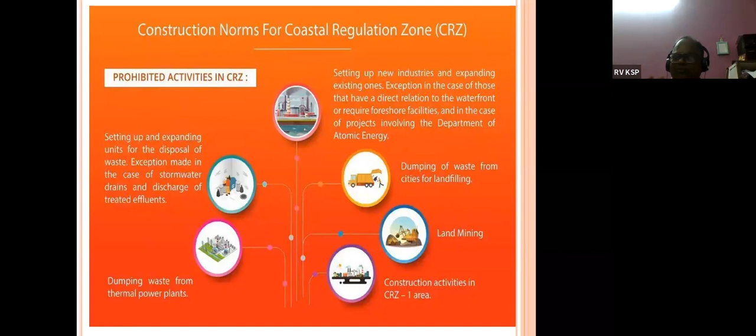Even for a plant, whenever we visit, we check what approvals they have, like factory industries approval, industrial shed approval from the Director of Industrial Safety with regard to the building, and any local body approval they have taken. We check all approvals to ensure they have not violated any regulation. That is one of the most important things we need to see.

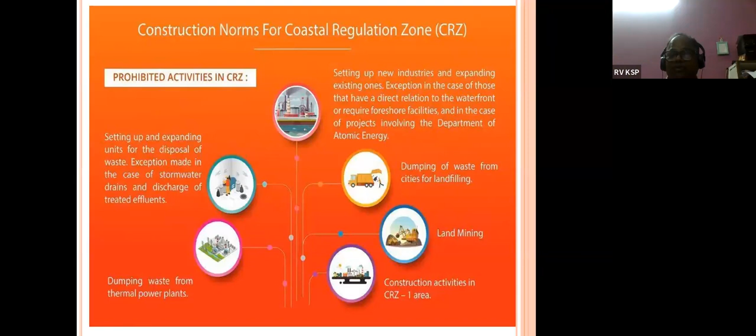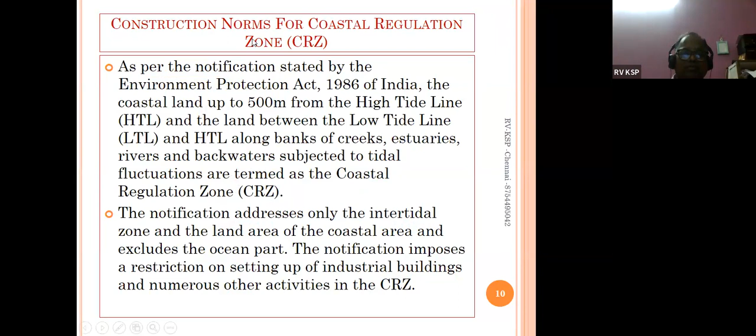Prohibited activities include some industries which are prohibited in the CRZ zone, like setting up new industries, as I've shown in the picture above, and expanding existing ones, which is highly restricted. The exception is in the case of those that have direct relation to the waterfront or require foreshore facilities.

I told you, shrimp industries are not permitted nowadays. Whatever was established earlier is still running, but even then, they are running with a lot of restrictions.

In the case of projects involving the Department of Atomic Energy, they are also governed by restrictions. They are allowed to take approval from the Pollution Control Board and Ministry of Environment and Forest. So a lot of restrictions are there, and they are allowed to run the entire industry only within the regulation.

Setting up and expanding units for disposal of waste - exception made in case of stormwater drain, yes, stormwater drains they allow, and discharge of treated effluent. Yes, they will have to have ultrafiltration, and they can let the treated water into the sea.

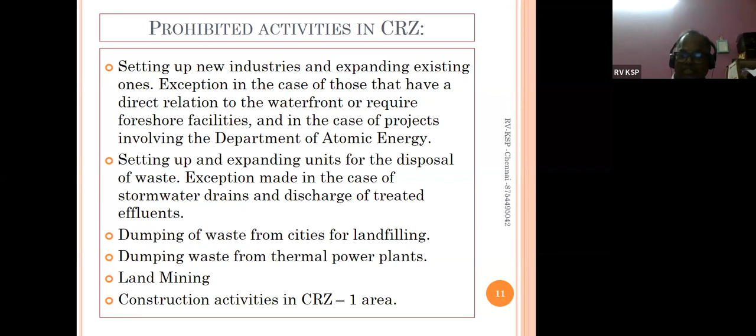The dumping of waste from cities for landfilling is highly not allowed at all. Dumping waste from thermal power plants - yes, they will have to do it only according to whatever control and regulations are there. Land mining is also not allowed, as we have seen, and construction activity in CRZ zone 1 is not allowed. Then let's see one by one what exactly it shows.

Norms for the regulation in each and every CRZ zone. CRZ 1: no new construction is permitted. Nothing is permitted except for projects relating to the Department of Atomic Energy.

Pipelines and conveying systems that include transmission lines are permitted, as is exploration and extraction of natural gas and oil. So no new construction is allowed in this CRZ zone. In fact, I have shown a picture where we can see that this is the CRZ zone where nothing is allowed in that particular zone. Okay, let's see the CRZ zone.

The buildings are permitted only on the landward side. Here, building is permitted on the landward side of the existing road, if that existing road is there, and on the landward side of the existing authorized structure.

These buildings will be subject to the local town and country planning regulation. In Chennai, Tamil Nadu, we have a combined building rule. Any rule will be as per the MUD, Ministry of Urban Development, which gives guidelines to all states. States have to formulate their own rules and regulations, but it will be at par with the MUD, with some rules according to local conditions. These buildings will be subjected to the existing local town and country planning regulation, including existing norms of the floor space index or floor area ratio.

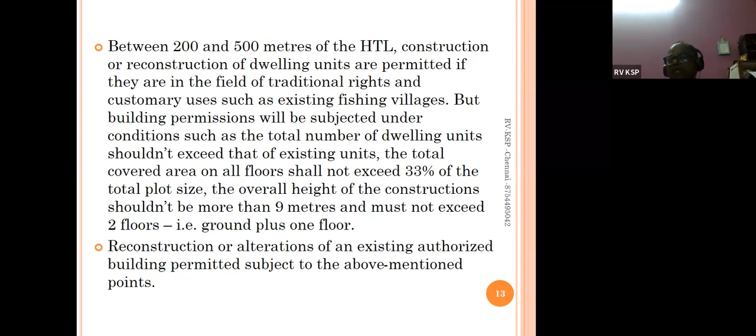Further, I just wanted to tell you some more things also.

The coastal regulation zones include creeks, bays, ocean, rivers and backwaters that are impacted by tidal waves and forces, and are up to 500 meters from the high tidal line, that is HTL, you should remember HTL means high tidal line, as well as the land between the low tide line and high tide line. This is CRZ1 area.

Why is CRZ important? The CRZ coastal zone was established in 1991. The coastal areas, including seas, bays, creeks, rivers and backwaters that are subjected to the tides up to 500 meters from the high tide line, that is HTL, and the land between the low tide and high tide, this is the CRZ zone, very important.

Who declares the CRZ zone? The CRZ zone is declared by the Central Government, Ministry of Environment and Forest. In exercise of the power conferred with clause (d) and sub-rule (3) of rule 5 of the Environment Protection Rule 1986, and all powers vesting in its behalf, the Central Government hereby declares the coastal stretches. That is what they declare very clearly.

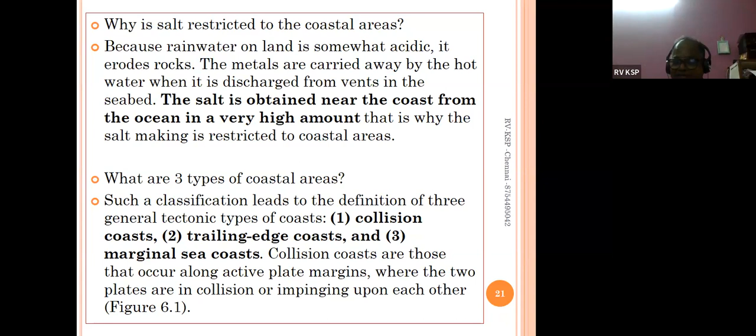The collision coasts are those that occur along the active plate margin. If you go deep only we can see that. I'm not going in deep on this - where the two plates are in collision or impinging upon each other. I think this is sufficient for that.

Which is the longest coastline in India? Gujarat is the place which has the longest coastline in India. Among the states, Gujarat has the longest coastline, and among the Union Territories, Andaman and Nicobar Islands has the longest coastline.

Why is coastal regulation important? And what is the importance of CRZ?

The importance of coastal regulation zone is that it is necessary to protect ecologically sensitive regions such as coral reefs, which act as a shield against tsunamis and cyclones. Many areas were protected because of coral reefs, near Chidambaram, in a place called Killai. That area was never affected, though it was a high tide area. There are many places in our country like Killai. Keeping the coastal zone safe can improve the lives of coastal communities like fishing communities.

We have felt the importance only after the tsunami. Everybody knows after the 2004 tsunami, it affected so many coastal areas across our country, and it was worst affected on the eastern side, from West Bengal all the way to Kanyakumari, and even Sri Lanka got worst affected.

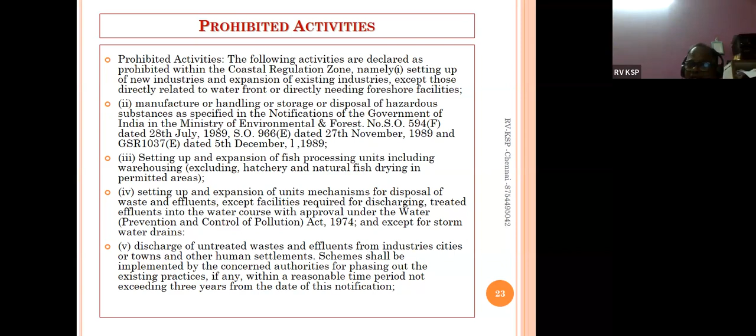Dumping of city or town waste for the purpose of land filling, or any existing practice, shall be phased out within a reasonable time, not exceeding 3 years from the date of this notification. Even dumping, if they were doing it earlier, is not allowed. Everything has to be moved.

Dumping of ash or any waste of thermal power stations is not allowed. You cannot dump just like that. You can see in many places, like Chennai harbor, there was a leak due to some vessel hitting another, causing heavy leakage. People were struggling to remove the oil, collecting that waste and removing it. Not only here, in many places, this is not allowed.

Land reclamation, bunding or disturbing the natural course of sea water with similar obstructions is not allowed, except those required for control of coastal erosion and maintenance, or clearing of waterways, channels and ports, and prevention of sandbars, and also except for tidal regulation. That is very important - tidal regulators and stormwater drains and structures for prevention of salinity increase, for sweet water recharge.

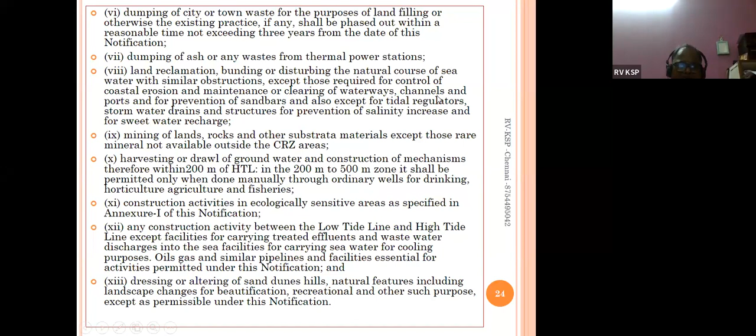Okay, we have seen whatever is not approved. Now we will see what are the permissible activities, the regulation permissible activities.

All other activities except those prohibited in para 2 will be regulated as under the notification. Clearance shall be given for any activity within the coastal regulation zone only if it requires waterfront and offshore facilities. Port is required, waterfront is required, foreshore facility is required, whatever is connected to the port is given. Any shipbuilding, like in Chennai at Kattupalli, there is shipbuilding, also at Ennur and Mangalore, these are some of the essential requirements.

The following activities will require environmental clearance from the Ministry of Environment and Forest, Government of India, namely construction activities related to defense requirements for which foreshore facilities are essential. This is very important, slipways and jetties. We got one of the works for the Mangalore shipbuilding area, so we have seen some of these things like slipways and jetties, except for classified operational components of defense projects for which separate procedures shall be followed. Yes, the regulations are very clear.

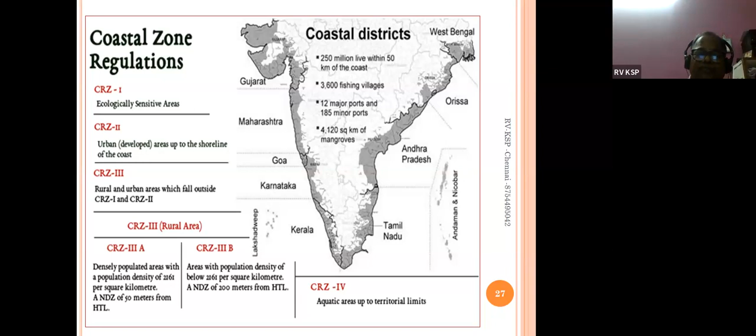So let's see more also for the CRZ1. Areas that are ecologically sensitive and important, such as national parks, marine parks, sanctuaries and reserve forests, wildlife habitat, mangroves, corals, coral reefs, areas close to breeding and spawning grounds of fish and other marine life, and areas of outstanding natural beauty.

See, they are mentioned very clearly what are the important things - historical heritage areas, areas of rich genetic diversity. I told you in one of the areas from Rameshwaram to Kanyakumari, the area is highly sensitive and highly protected. You can see the turtles coming to the seashore in particular seasons. It is highly protected.

So, areas of rich genetic diversity, areas likely to be inundated due to rise in sea level consequent upon global warming, and such other areas as may be declared by central government or the concerned authorities at the state or union territory level from time to time. The department is there, they will monitor.

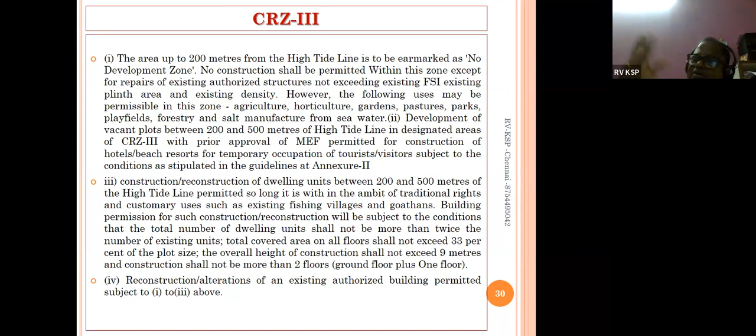So reconstruction and alterations of an existing authorized building is permitted, subject to above 1 and 3. What is above 1 and 3? The first says 200 meters from the high tide line is earmarked as a no development zone. Very clear, no construction shall be permitted within this zone except for repair of an existing building, not new construction. And you cannot go for more FSI, not permissible, not permitted.

What they say in point one is, uses that may be permissible in this zone are: agriculture, horticulture, garden, pastures, parks, playfield, forestry, and salt manufacture from the seawater.

See, there is a regulation. In our state actually, there is a salt board, the Tamil Nadu Salt Board.

They govern and give approval for private parties to do manufacturing, but within regulation, they don't just do as they please. They get a regulation, they get a license, and within that they will have to operate. No big developments will be there, only temporary structures will be allowed. You cannot go for any big permanent structures. Wherever a warehouse is required, that is in the harbour area only, not in any other area - not permitted elsewhere.

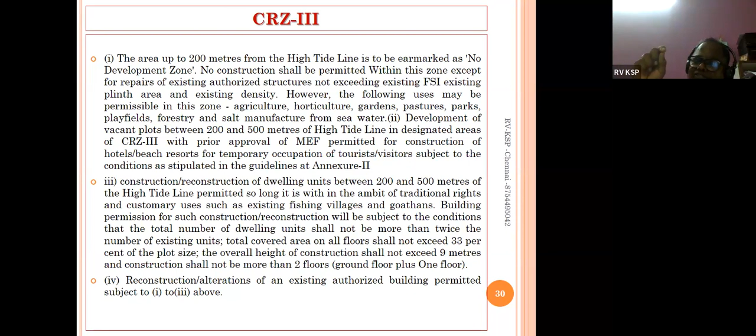The development of vacant plots is very important. From 200 to 500 meters of the high tide designated areas of CRZ3, it requires the prior approval of MEF. Very clear.

Sharma, I am in the class, Sharma. I'll just call you, please. Huh?

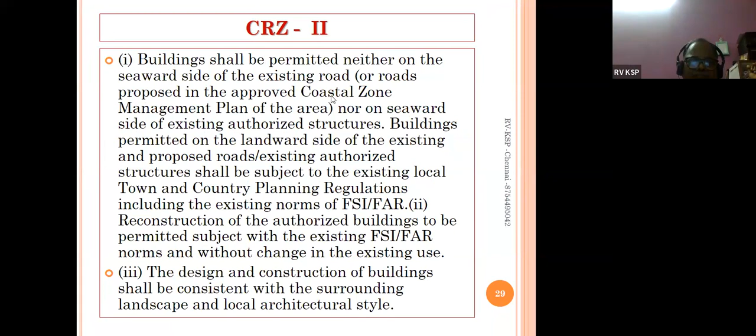But in CRZ3, with the prior approval of MEF, construction of hotels, beach resorts and temporary occupation for tourist visitors is permitted, subject to the condition. See, they are very clear - every approval is given only subject to the regulation. They will follow only the regulation.

What does 3 say? It says very clearly that construction or reconstruction of dwelling units between 200 to 500 meters of the high tide line is permitted, so long as it is subject to traditional rights and customary uses, such as existing fishing villages and goathans. This is exactly what they permit.

Building permission for such construction or reconstruction will be subject to the condition that the total number of dwelling units shall not exceed more than twice the number of existing units, with restriction. Total covered area of all floors shall not exceed 33% of the plot size. The restrictions are as per the notification and guideline, and every state has their own rule.

The overall height of construction shall not be more than 9 meters, and construction shall not be more than 2 floors, that is ground plus 1 floor. Reconstruction and alterations of an existing authorized building are permitted subject to points 1 and 3. That is in CRZ3.

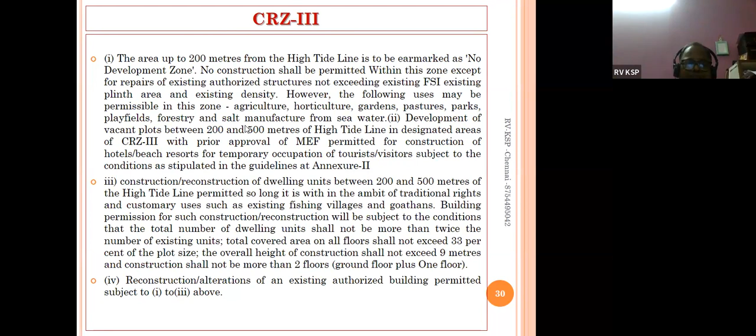They are very clear. The notification is very clear with regard to the permission. The design and construction of the building shall be consistent with the surrounding landscape and local architectural style. This is the guideline.

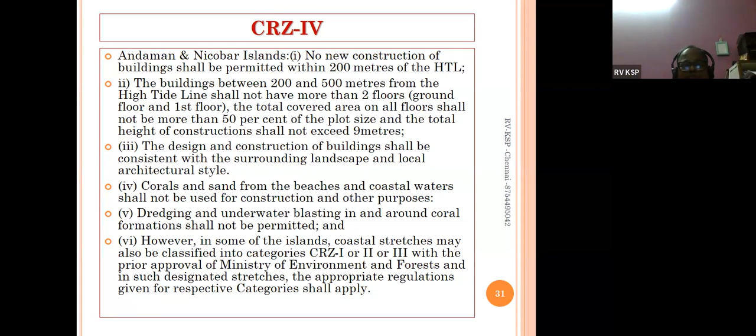In Lakshadweep and small islands, there are plenty. For permitting construction of a building, the distance from the high tide line shall be decided depending on the size of the island. It will depend on the size of the island - if restrictions are put, no development will be there. This shall be laid down for each island in consultation with experts and with approval of the Ministry of Environment and Forest, MOEF.

Keeping in view the land use requirement for a specific purpose vis-a-vis local conditions, including hydrological aspects with regard to erosion and ecological sensitivity - this is very important. The buildings within 500 meters from the HTL shall not have more than 2 floors in the islands, not anywhere else - ground floor and first floor.

The total covered area on all floors shall not be more than 50% of the plot size for the island, not for other areas - other areas it is only 33%. And the total height of the construction shall not exceed 9 meters. Everywhere it is 9 meters, ground plus 1.

Here also, the design and construction of the building shall be consistent with the surrounding landscape and local architectural style. This is also governed within that. The corals and sand from the beaches and coastal water shall not be used for construction or other purposes - of course, we know that.

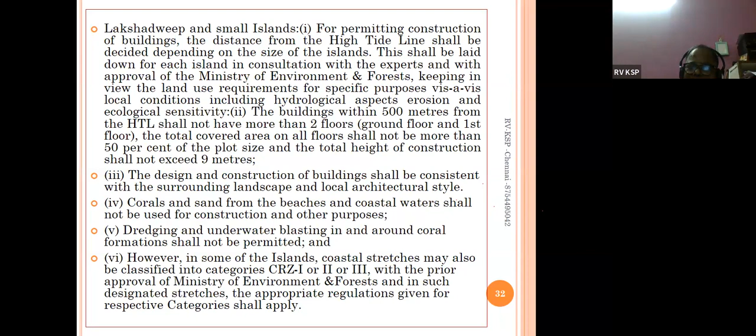Oh, should the water be used for construction? Never - we'll have to bring water from somewhere else for construction. Dredging and underwater blasting in and around coral formations shall not be permitted, never be permitted.

However, in some of the islands, coastal stretches may also be classified into CRZ 1, 2, 3, with the prior approval of MOEF, that is Ministry of Environment and Forest. In such designated stretches, the appropriate regulations given in the respective categories are applied. This is for the island. Each and every island, depending upon its size, will be regulated wherever required.

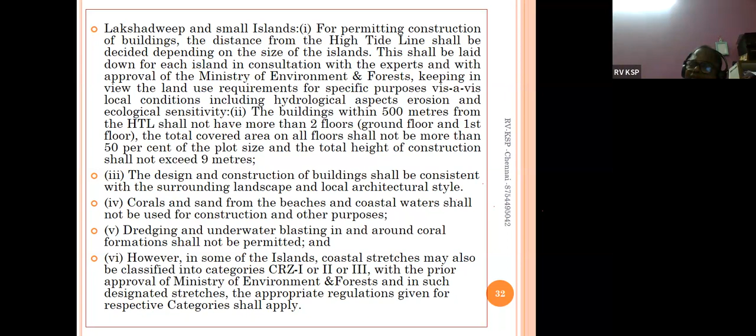There are some case laws also on the coastal regulation zone. Interesting. Let's see one by one.

Jagannath versus Union Government of India, and Gopi Aqua Farms and others versus Union of India. Another review petition is pending. This is something, okay.

The aquaculture is not an industry requiring waterfront. I told you in the beginning - the shrimp culture, prawn industry is neither directly related to the waterfront, nor directly needing the foreshore facility.

Shrimp ponds are prohibited by law near the seashore under the coastal regulation zone order. The shrimp culture industries are covered by the prohibition contained in para 2 of the CRZ notification.

An industry dependent on seawater cannot by itself be an industry directly related to the waterfront or directly needing the foreshore facilities. For shrimp industry, what is required is brackish water, which can be drawn from any source, including the sea, and carried to any distance by pipes.

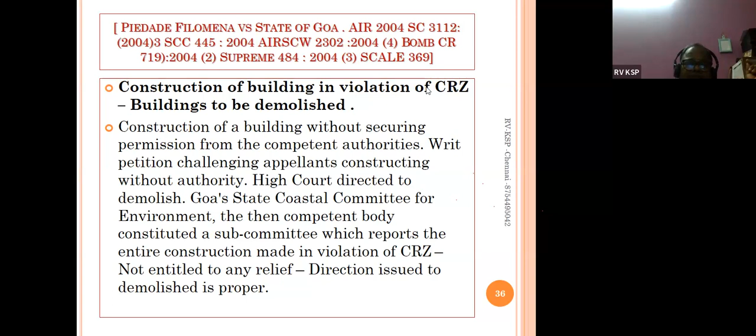This next case: prohibition of construction applies to residential building also. Yes. Though the CRZ notification has been issued under the Environment (Protection) Act 1986 and rules 1986, it applies to all environmental degradation.

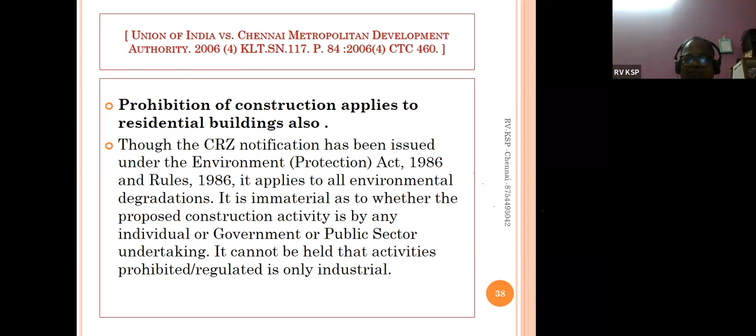Whenever we go, we should know 2 things for our knowledge. One is the CRZ rule, the other is the local body rule. You should be well aware of your local body rule on the CRZ zone. In every development control rule, it has been mentioned very clearly on the CRZ- what is the limitation, what is not to be done, what is to be done, everything has been given in that.

That means we'll have to go through the entire thing. We should get knowledge on that, be aware of that- the CRZ and local body, and what the local body rule says on the CRZ.